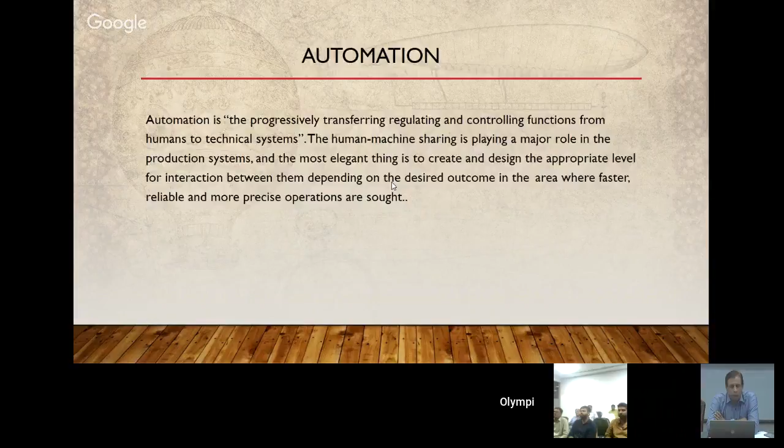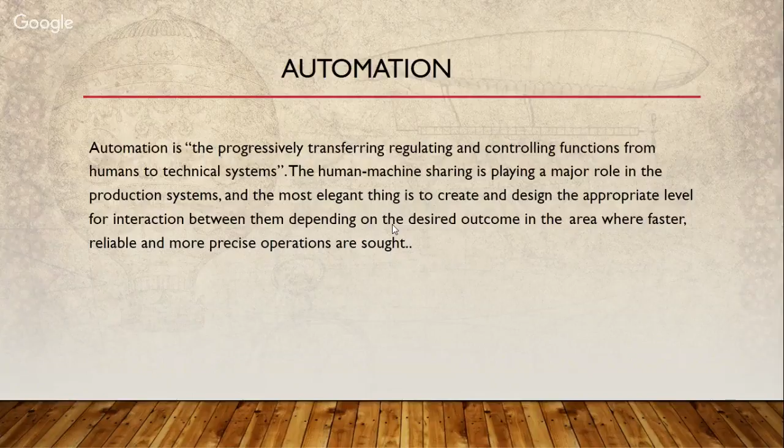Automation is the progressively transferring, regulating, and controlling function from humans to a technical system. This results in higher efficiencies, safer methods, and a faster way of working. There are some debatable questions on this. Some of you might question, how is it safer? If an automated system develops a fault, there is no other angle to correct it. Definitely. So we'll touch upon all this while we talk about automation and human aspect further.

One of the prime examples of automation is in the industry. Industry is the prime mover of everything which moves and develops in the world. The automatic control of the manufacture of a product through a number of successive stages is automation. The application of this automatic control to any branch of industry or science also is automation.

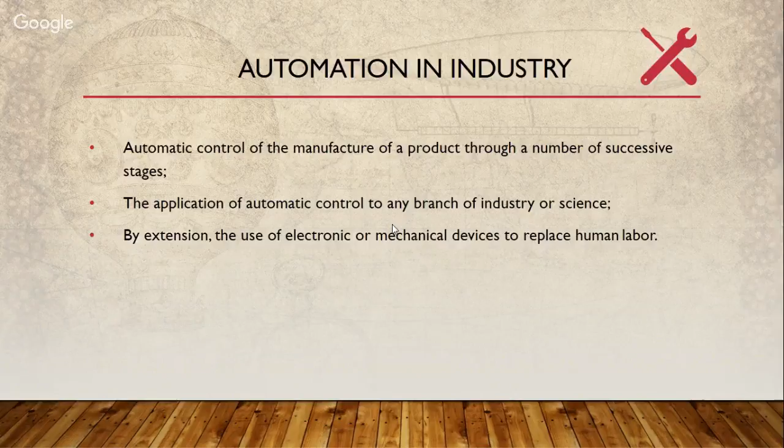So we'll first go into a brief history of robotics, of automation, which you will see on the slide, and you will refer to it, that it started in a period as ancient as Greece and Egypt. This was by way of water, which was powered for ceremonies, in the sense that there were certain ancient ceremonies in which water was used as a power source, and this was the first basic concept of automation in human life.

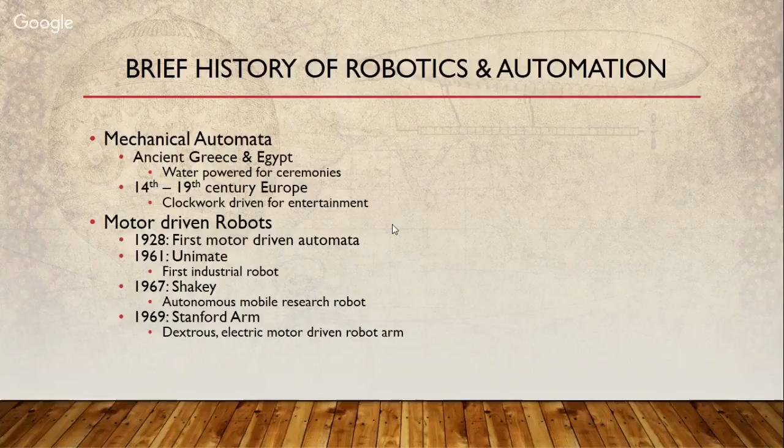In the 14th to 19th century, clockworks and other things driven for entertainment were a part of robotics and automation, or you can say the precursor. Motor-driven robots were first brought into operation in 1928. The first industrial robot came in 1961. The electric-driven motor arm came in 1969.

Now, automation has moved at a much faster pace in the 21st century. We have used automation mainly to overcome human capacity problems, automation of physical tasks like loading, unloading, packing, routine tasks like production increase, welding, nailing, riveting, even segregation. So we are moving at a fast pace in mechanization in the industrial sector in the 21st century.

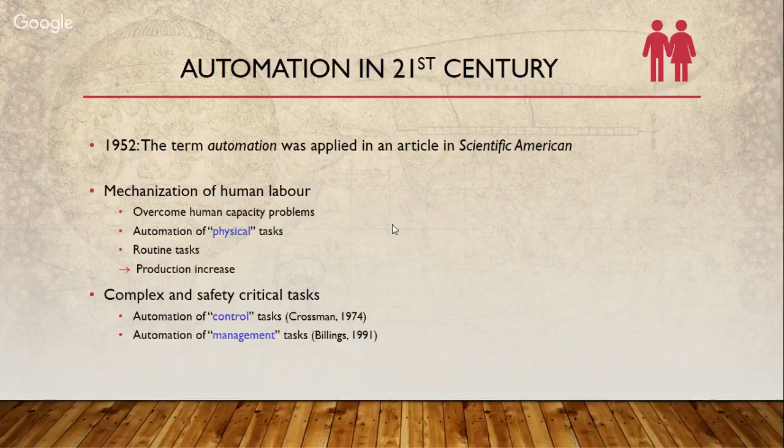Complex and safety critical tasks, control tasks, management tasks are also now moving towards automation. The prime example of automation in our lives is also your cell phone. There are so many things automated through your cell phone, which today are a part of our lives. Knowingly and unknowingly, we are using automation, even to the extent of school children using the technology for their benefit.

In our lives today, automation is used for optimizing logistics, detecting fraud, that's in the financial sector, composing art, we have digital art, conducting research. A lot of research and testing methods are now automated. The data analysis is much faster through automation. Translations, intelligent machine systems like robots, and they are transforming our lives for the better.

You will be surprised, and maybe some of you might not be surprised, but everything that Amazon, Facebook, IBM, and Microsoft is using is a part of automation and intelligence, automated intelligence in our daily lives. Tesla is one of the prime movers in self-driven cars, and that is what they're using for automated controls of automobiles.

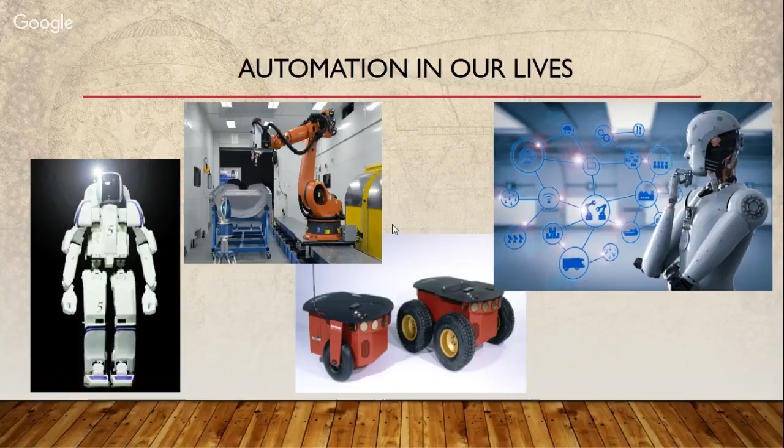The slide shows automation in our lives. You will be very, very aware of all this which is being used today in our lives. Robots, medical sciences robots, automobile industry, in the normal industry, even mobiles. The industrial robots sector is one of the most actively used and efficiently used automation systems in the world. Most of the automobile companies and automobile factories are right now automated to 90% of the extent.

Only certain tasks which are left to manual labor are being done by manual labor. Otherwise, automated robots and automated lines are a part of our lives today. The automobiles are being made more efficiently, faster, and much more effectively. The welding which takes place in an automobile is much safer, much more uniform, and the quality is of exceptional standards, which a human being can never give.

You'll be surprised to know that the rate of production of a car in Maruti today is 1.1 minute for one car. That is the time frame in which a car is being produced in Suzuki. In the Italian automobile manufacturer Fiat, the production rate is 55 seconds.

Okay, sometimes the capacity required at the rate which marketing is able to sell the product also hampers the effectiveness and the speed of the automation. But the capability of the system is such that the factories in Germany and in Italy are and will be able to produce one car every 35 seconds if allowed to, and if the market demands. That is the rate at which we are talking of automation working in the industrial sector.

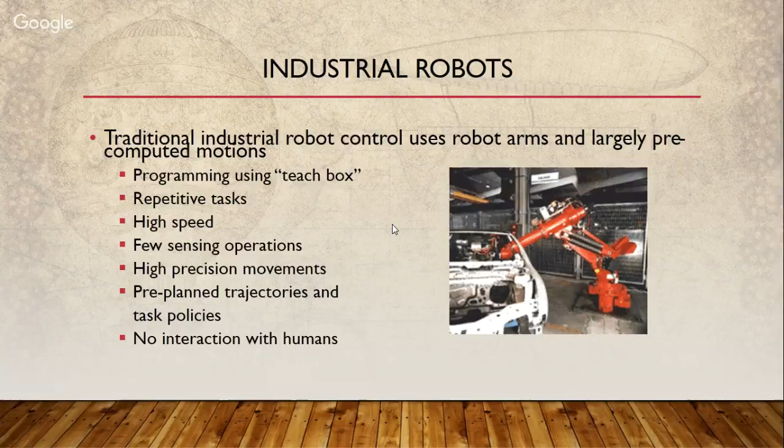If you are able to look on YouTube at a video showing the manufacturing of the Mercedes C-Class car, or even the Volvo, you'll be able to see the extent of automation of these industrial robots which has taken place in the industrial sector, especially in automobiles. The slide also shows you where automation supports us in our daily lives, or in which sectors.

Automation in homes is a part of our lives now. You can control lighting, you can control blinds, curtains, air conditioning, heating, even to the extent of whether the door has to be locked or unlocked is through automation.

Automation has come to stay in our daily lives, and a normal family and a housewife is also using automation to that extent. The human aspect, the role that it plays, we'll discuss about it later. But let's start first viewing what all we can do.

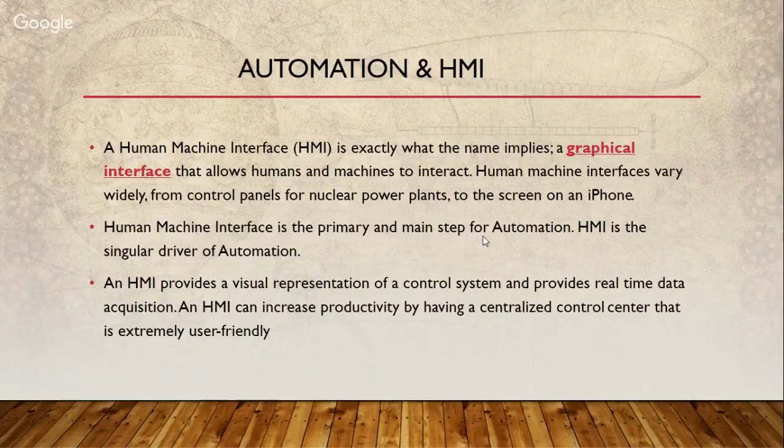This can be in various forms, in verbal, audible alarms, in graphic interfaces, in showing you how actually the product is behaving, how the machine is behaving, and also what corrective action is being forwarded by the machine, that also is displayed to the human operator or the controller of the machine. So the human machine interface is a very, very critical part of the whole system of automation.

Now, before we go into details of automation, we also need to look into that there are certain risks connected to automation. Not all automations are fail-proof or safe. However, the world is moving very fast into correcting these systems and taking care of these anomalies so that the automation that we work with is safer and better.

So some of the risks that we want to talk about is sometimes in the degree of proceduralization. So the automation system becomes too extensively overloaded to work on its own. Automation might fail due to various reasons. The technology is so complex or so low that the automation might not be possible in that.

Cost effectiveness. Sometimes manual labor, like in the third world developing countries, labor is much cheaper than automation. You might not want to automate the line to that extent because spending money on robots, or on automation, is much more expensive than actually putting people on the job.

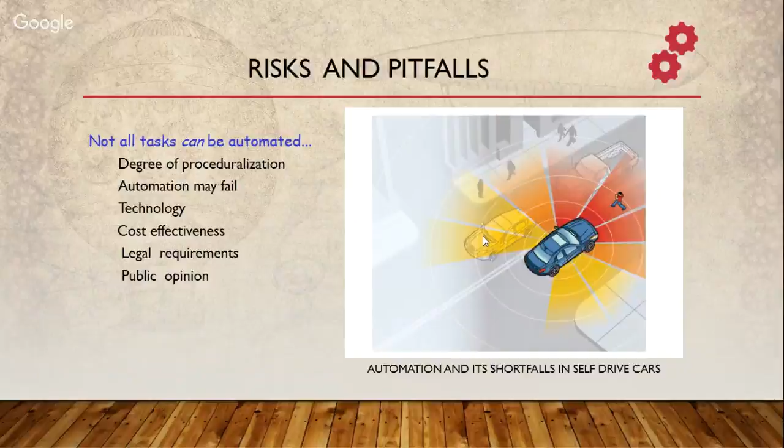You can see an example today in Europe on the tolls. The system is totally automated. Your car has a tag and moves through the lines effortlessly. All cars are equidistant. Sensors are alarming, and everything goes on like clockwork.

But in India, we do not go for full automation even in such places. Why? Because we have cheap labor. On every toll, on every channel, you will find 4 people. On the barrier, 2 people, 1 person giving you a slip, collecting the money. And we are still working in that system because we find that labor is much cheaper than automating the control.

Now, the next point is legal requirements. Sometimes you cannot have an automated system because of legal requirements. You might have to put everything under CCTV surveillance, but there are areas where due to legal requirements, you are not able to put CCTV cameras. So you cannot have control of visualization. Legal requirements also say that people have to be respected for their rights. So you cannot put automation in places where legal rights, privacy, and other things of people are violated.

Public opinion. Public opinion might be very strong against technology in certain places. They will resist technology to be put. And in certain cases, especially like India and the developing countries again, where vote banks are a huge issue, we are not able to put automated technology because getting the votes of the people is more important than making lives better and faster. So that's another thing.

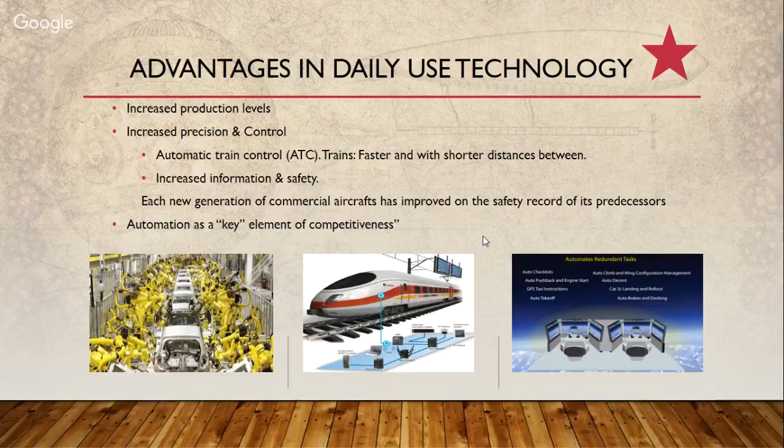We do have accidents in aircraft. The black box gives us information, but it is also a proven fact that overall safety and precision have gone up and the losses have gone down immensely, thereby saving human lives, making air travel much safer, and getting people faster from one end to the other.

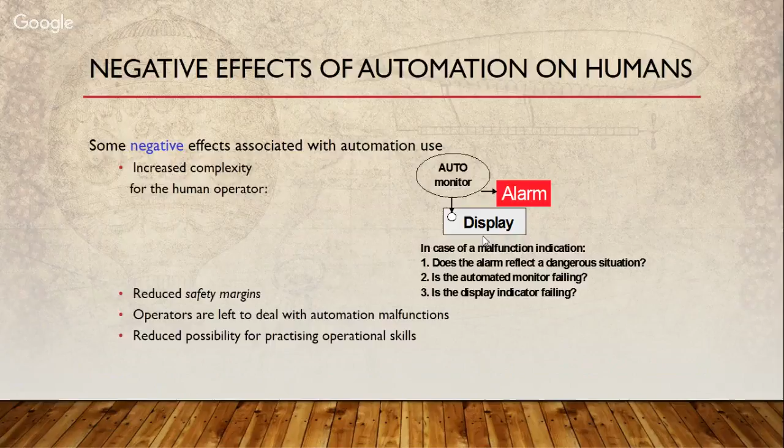If the automation fails, then the results are catastrophic. And that is where we need to keep alert, really monitor the system and take corrective action. The operators are left to deal with automation malfunctions. Earlier the operator had to just deal with his own malfunction, and he had to only deal with how he was performing.

He could recorrect himself if he found that he had moved the tool a little faster. Now the operator has to move at the speed of the machine. A machine is moving at an extremely high rate with the automated system, and the malfunction, if it takes place and the operator is not able to take corrective action, will have serious repercussions.

One of the examples that I would like to share here with you is in one of the organizations where I worked, and we had an automated packing line for confectionery, bubble gums to be exact. Now, the rate of packing of the machine was something to the extent of 2,000 pieces per minute. So you can really experience, if you visualize, the speed at which the machine was moving for giving 2,000 pieces per minute. And there were 20 machines of this capacity working together on the line.

Now, the automated line had to fill jars automatically, where the jar sensing automation system had to cut off the supply of bubble gums into that jar once the 150 mark was reached. You can imagine if one machine was producing 2,000 pieces per minute, 150 pieces in a jar would just take 6 or 7 seconds.

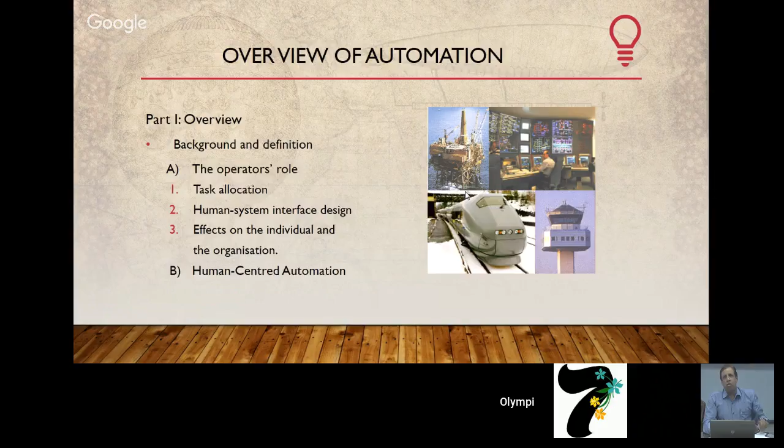The effects on the individual and the organization. As we briefly touched on earlier, the effect of automation on the individual and the organization. If the individuals are not a part of the design system and of the automation system, they will feel alienated, they will not become a part of the change, not be able to embrace technology to the extent where the organization benefits, and shop floor problems will escalate. Human-centered automation is another one, which is a part of the design of the automation system which we have to see.

The key issues of automation: the most important issue is the human. And the human being remains the most flexible and powerful weapon, in the sense that we are able to justify, we are able to reason, we have the cognitive ability to think about a situation, which a machine does not have. In spite of whatever programming you might have in a machine, the human mind is still more powerful than that. Artificial intelligence definitely is moving, but we are nowhere near how a human brain can respond to a situation and be more logical than a machine.

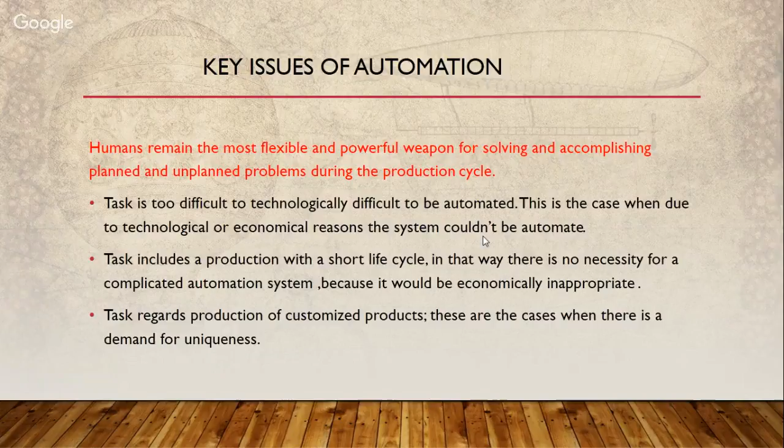The automation system can definitely make it, but again, it becomes unviable. It doesn't fit into our commercial requirement, and we will have to look at an alternative where 10 people can work much more effectively and commercially viably than an automation system. So in these key automation systems, human interference, human logic and human interfacing to take the necessary decision is an important part in deciding automation.

I will now show you two videos of a real-life true incident where flight 1549 crashed near New York into the river. These are a case study of how automation and human beings' logic, thinking and reasoning differ. Just have a look at these videos one by one.

No, it's not, no copyright, no nothing. Don't worry. That's perfectly well. I'll check them, all the videos.

So just have a look at that, and then we can draw our inferences and talk about this. The first video will show you how the investigation took place, and the two pilots who are shown in this. This is a true incident in the history of civil aviation, where Captain Sullenberger, who was the commander, took a decision to land the plane in the river, whereas the automated system was telling that he can land on the airfield. And that is what the inquiry was about. The second video will explain how human logic and human reasoning were much better than the automation system. So just have a look.

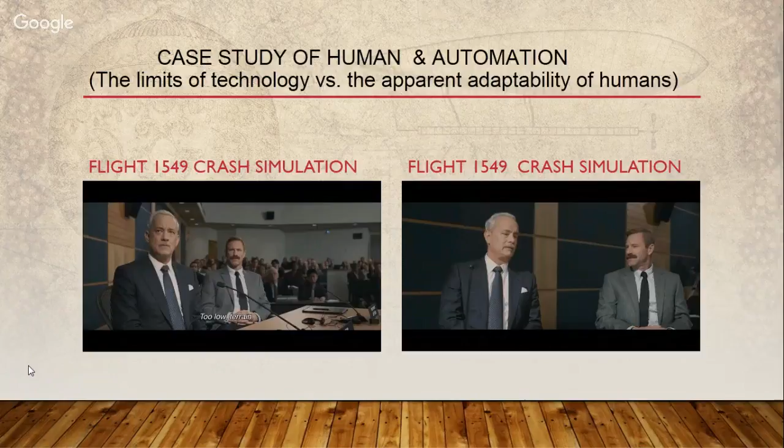Too low terrain. 50, 40, 30, 20. Huh? Successful landing at Teterboro, runway 19. They can have one more. Multiple airports, runways, 2 successful landings. We are simply mimicking what the computer already told us. You know, a lot of toes were stepped on in order to set this up for today. And frankly, I really don't know what you gentlemen plan to gain by it. Can we get serious now?

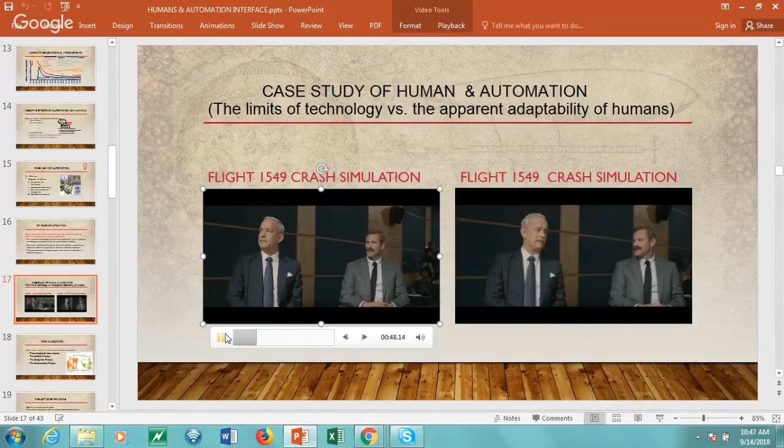Captain? We've all heard about the computer simulations, and now we are watching actual sims, but I can't quite believe you still have not taken into account the human factor. Human piloted simulations show that you could make it back to the airport. No, they don't. These pilots were not behaving like human beings, like people who are experiencing this for the first time. Well, they may not be reacting like you did. Immediately after the bird strike, they are turning back for the airport, just as in the computer sims, correct? That is correct. They obviously knew the turn and exactly what heading to fly. They did not run a check. They did not switch on the APU. They had all the same parameters that you faced.

No one warned us. No one said you were going to lose both engines at a lower altitude than any jet in history. But be cool. Just make a left turn for LaGuardia like you're going back to pick up the milk. This was dual engine loss at 2,800 feet, followed by an immediate water landing with 155 souls on board. No one has ever trained for an incident like that. No one. In the Teterboro landing, with its unrealistic bank angle, we were not the Thunderbirds up there. I'd like to know how many times the pilot practiced that maneuver before he actually pulled it off. I'm not questioning the pilots. They're good pilots. But they've clearly been instructed to head for the airport immediately after the bird strike. You've allowed no time for analysis or decision making. In these simulations, you're taking all of the humanity out of the cockpit.

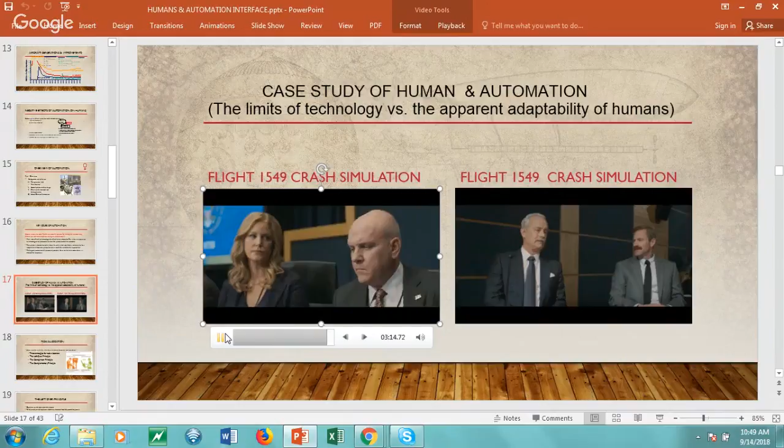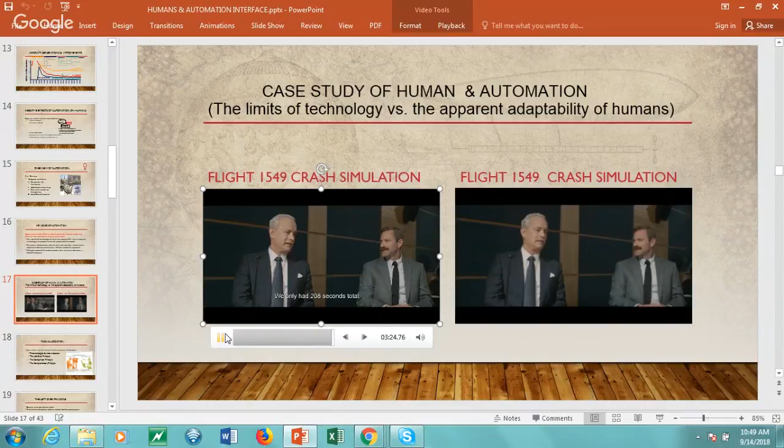How much time did the pilots spend planning for this event, for these simulations? You are looking for human error. Then make it human. This wasn't a video game. It was life and death. Sully's right, that's worth a few seconds. Please ask how many practice runs they had. 17. The pilot who landed at Teterboro had 17 practice attempts before the simulation we just witnessed. The reaction decision time will be set at 35 seconds. 35 seconds, not enough time. We only had 208 seconds total, so I'll take it. Upload the link.

Now let's have a look at the next video, which will show you the simulation that was done and where the pilots were found that they had taken the right decision, because the automated system earlier did not have the same parameters which the pilots had. Just have a look at that.

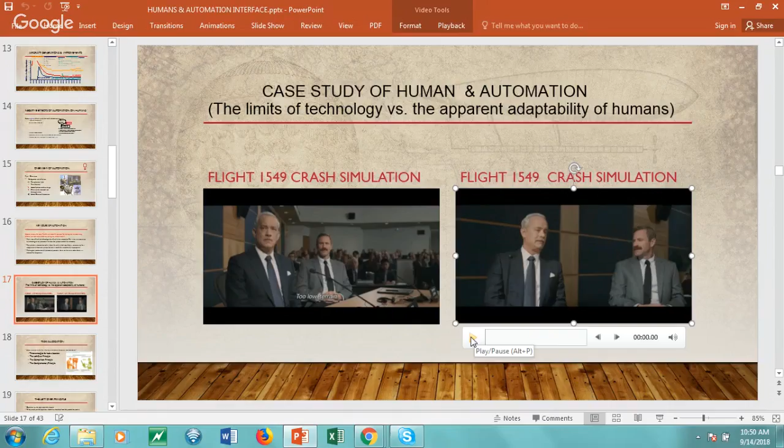Upload the link, return to LaGuardia. Now with an added 35-second delay in response time. Birds. Okay, I saw them. 35 seconds. Time's up. Here we go. Flight path vector. Going for 1-3. Activate confirm. You are confirmed. Okay, ready right for the airport. Obstacle. We're about 7 miles from runway. Caution. Obstacle. Terrain. Pull up. Too low. Terrain. Extra speed. Leave the flaps. Too low. Terrain. 50, 40, 30, 20.

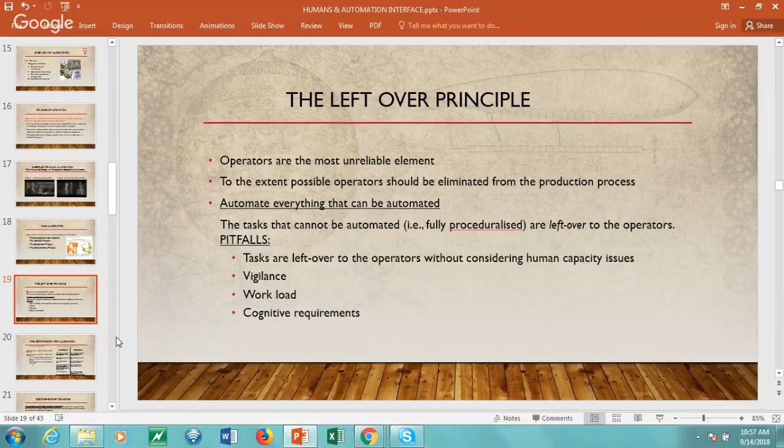The pitfall in this kind of system actually is that the operator needs to be much more vigilant. He is overloaded, and his cognitive requirements are not kept in mind while deciding on these issues. This is where the whole system of task allocation according to the leftover principle fails. So this is not the right system to allocate tasks. You will all agree.

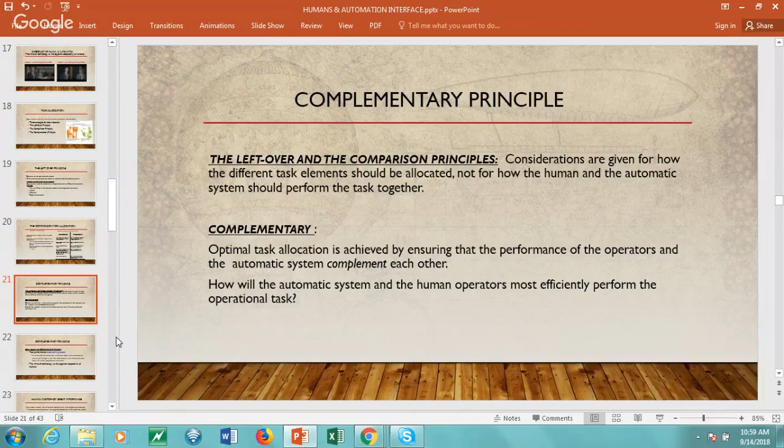They have to work together to perform the task to the best of both of their abilities, rather than just for one. So the complementary principle is the one which is normally decided by the designers who design the perfect system.

The complementary principle also takes into account that performance is a dynamic process. It can be difficult to foresee. So therefore, the system design has to keep in mind, when it is building the complementary process, how machines and human beings have to work together, and the limit of technology.

Sometimes the complementary principle is not able to really give the final product because there is a limit of technology versus adaptability of humans. So there is a limitation on both the systems. So the automation system is not able to perform.

Now, repeatedly, we have seen that the human factor is of great importance in the production system for flexibility, innovation, quickness, and imagination. The human part in the production system is still considered to be incomplete in a full automation system because it lowers the level of automation. Therefore, automation comes into play where the speed and the accuracy will be complemented by the flexibility, innovation, and imaginative process of a human mind.

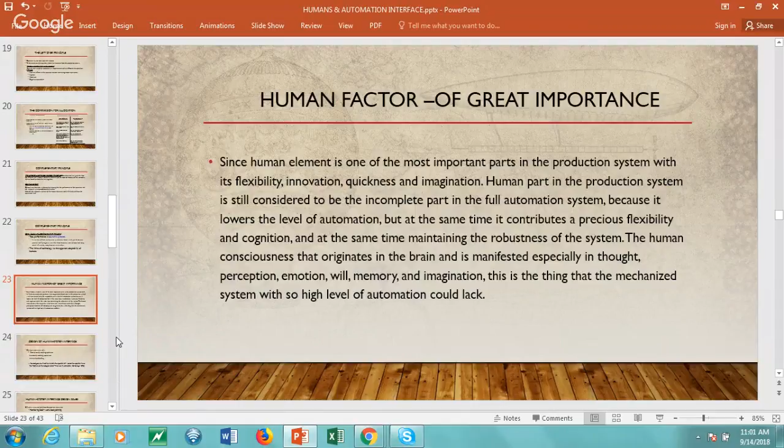On the part of how the tasks will have to be allocated and how the system will have to be designed, we will come after a little break and then talk about human interface designs, how the human system has to be allocated these tasks and how it is able to perform, how effectively we can deal with it, what are the issues that the human aspect also have to be kept in mind while designing an automation system, and what the future holds for us.

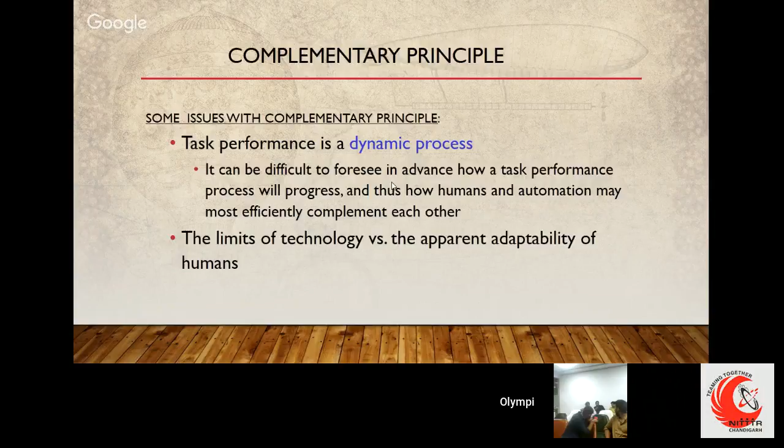You can start. One second. Okay, let's start. Yes, sir. Okay, welcome back, everyone.

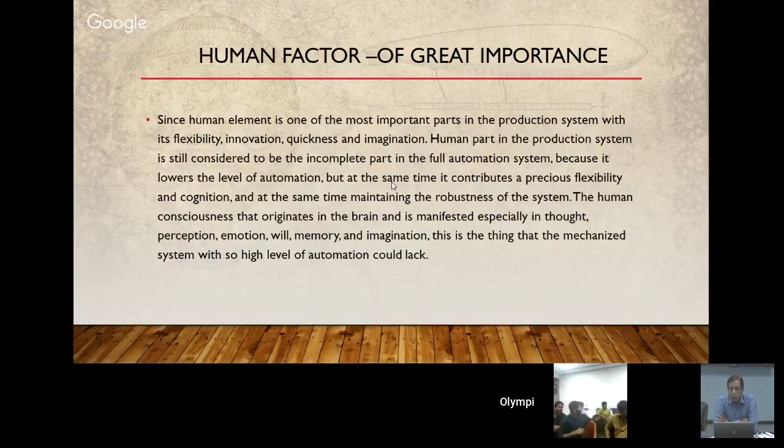So we left our lecture on the human factor in automation; now we'll carry on from that same place. I'll just go through again from the aspect of the human factor in automation. The human element, to repeat again, is of foremost importance because of its cognitive abilities, because of its reasoning, logic, and emotional acceptance, as well as reasoning ability. In the production system, the human factor plays a very, very important part. We have seen that in the video, again to repeat.

Because the human consciousness originates in the brain and manifests in the thought, the human mind still is one of the most powerful systems in the world. Whatever advancements we might have made in automation, the automation system still depends upon the inputs from the human operator. As in every automated system, we say what goes in comes out. Even if the laptop has all the software installed in it, the data which will come out will depend upon the inputs which the human operator is giving into the system.

The next step, I agree, is artificial intelligence. The ability of the automated system to sense by itself, as well as collect data by itself, collect feedback by itself, and then take action. But still, it cannot match the human brain in terms of the inputs and the logic that it can generate.

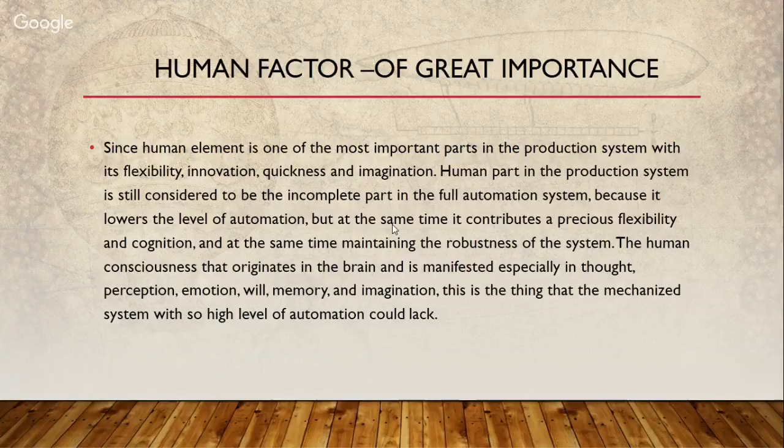An automated system, like an in-flight system of a plane or of a self-driven car, or even the sensors in your normal car, called proximity sensors, which tell you that your car is near to another car or another object, still depends upon the corrective action that the operator will take. So the supervision needs to be constant. The alarm can come, but if it is not supervised, it can still result in an error or an accident.

Deviation handling. If the process has got deviations, it is the human operator only who can handle deviations. The automated system or the interface does not possess the 100% capability of handling deviations. We will have ranges, we will have tolerances in every system. Again, the issue of reasoning and logic comes into play, which the human operator has to handle.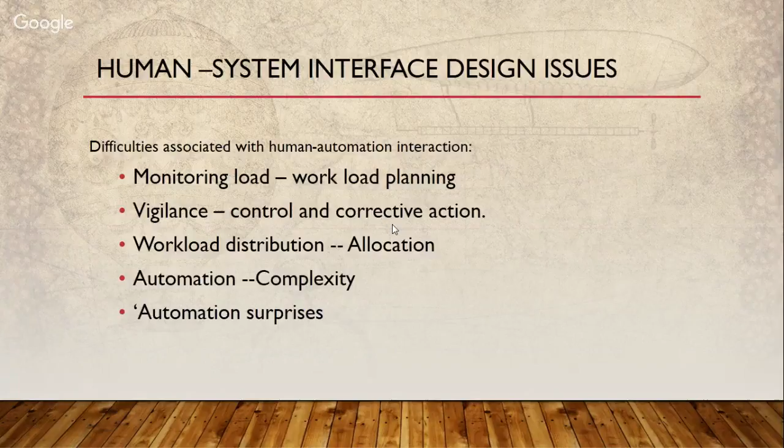Automation surprises. Sometimes we see in operations where the human aspect, because it has not been taken into account while designing the interface, creates surprises where the operator lacks the ability or training to handle automation surprises. The complexity is a part in this surprise.

The automobile companies have started building in alarm systems which, if they sense a monotony in the driver operation, if they see that the car has been going for a very long time in a particular direction but is now veering off course, give a software indication that the driver has gone off to sleep. So they're trying to build that in, and it gives an alarm.

However, taking everything like this into context, we still have physical and mental isolation of the human being while designing an automation system. An automation system which is doing repetitive tasks, where the operator just has to load the piece on a machine, results in a mental and physical isolation of the human being. This results in a lot of other issues which we will discuss later.

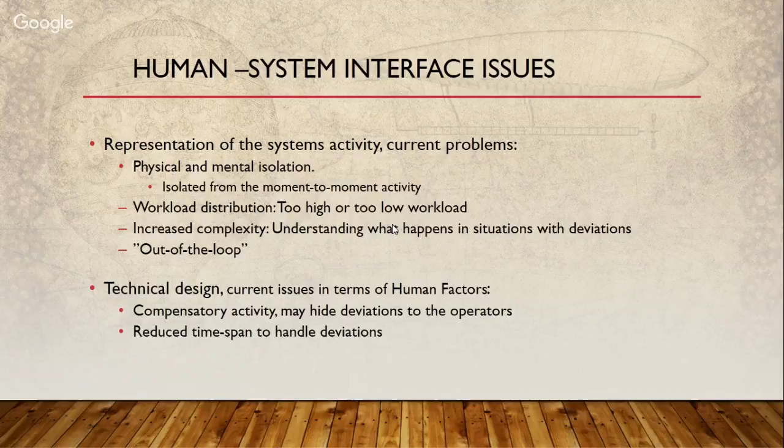In the design of human and system interface, the degree of automated system should be done in a way that is transparent for the operator. So one of the most important factors that comes into play is that the human operator or the human being who's associated with the automated system needs to be aware step by step of what the system is doing, the ability of how the system is performing.

The operator or the human being cannot be blind, or he cannot be cut off from how the system is performing. Now, these problems can be handled by way of feedback from the system in various ways. The system itself keeps the operator or the human element updated on various changes, progress, and work as it is carrying out.

These representations or the kind of feedback that the human operator gets can be in form of text, it can be in form of graphics, it can be in form of sound. So there are alarms which will tell you if there is a deviation or there is a movement which is contrary to the program. There is a graphic which tells you whether the activity is being done according to the way the system has been programmed or the way the system is to run.

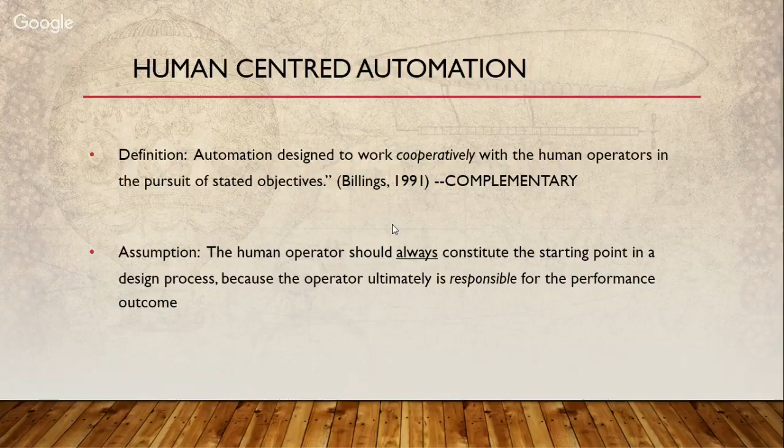HCA, to take it further, the human-centered automation design system, has to first keep the basic premise in mind. That is that the human operator must be in command. We cannot take away the command from the human operator, because that again puts at risk a lot of issues which we have discussed earlier: taking corrective action, not getting the hang of the complexity of the system, not being able to respond faster to errors. All this comes into play.

So once we have taken that the human operator is to be at the center of this command, why is it to be done? One, so that he's able to command effectively. The human operator must be involved, then only he'll be able to command effectively. To command effectively and to be involved, the human operator must be informed. So he has to be a part of the feedback system. Immediate feedback or immediate response has to come to the operator to feel involved and to command the operation.

The human operator must be able to monitor the automated systems. Being informed is a part of monitoring. So if there is regular information, he will be able to monitor the system much more effectively. The automated system needs to be predictable. Unpredictable systems will result in accidents and errors, which the human operator will never be able to handle. It has to be a predictable system.

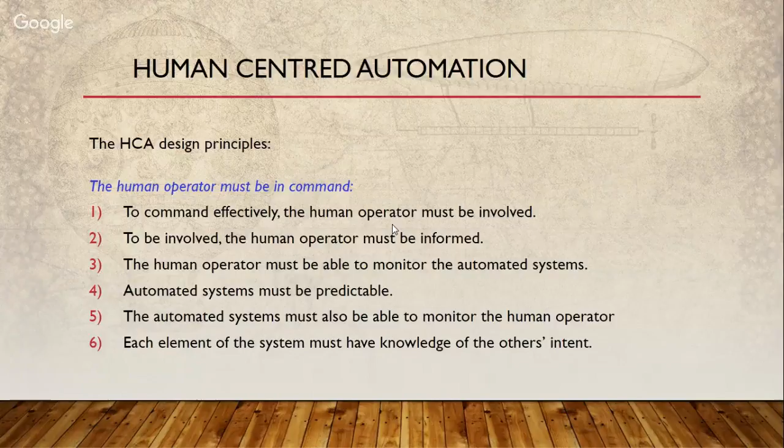Each element of the system must have knowledge of the other's intent. That means the operator should know what is the intent of the machine, and the machine should know what is the intent of the operator. If this is very, very clear between the two, then the automation system works effectively and in optimum capacity.

If the pilot is involved, the automation system can assist by providing better and more timely information. So it aids judgment, whether he can turn, whether he can land in these circumstances, what is the wind velocity, what is the temperature, what exactly are the air pockets. So all this can assist in timely information, can help in taking a better judgment.

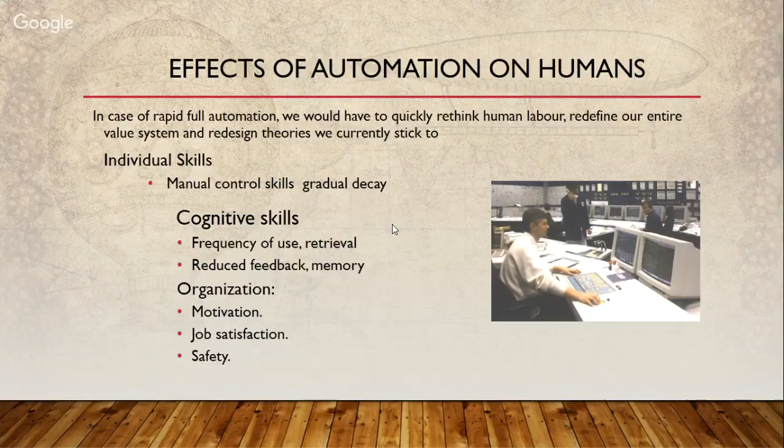In the organization, the effect automation has is on motivation. If human-centered automation design is not taken into account, motivation is a very big factor which comes into play and affects the morale of the worker. The worker might have worked for a bonus, an incentive or satisfaction, where the number of pieces he produced was part of what he was earning, also to show his skills, his effectiveness, his capabilities. There was a number with which he could be associated, that this worker has won a prize because he could produce X number of pieces in his shift.

If the automation system is designed without him, the effect it has on his morale, with people saying, oh, it's the automation system producing, it is not you: his capabilities are undermined and his motivation level goes down. The other aspect is he will always feel threatened that his incentive is going down because he is no longer associated with productivity. Job satisfaction results in the same thing. When the motivation goes down, the morale goes down, job satisfaction starts going down, and the operator will never perform to his optimum level.

Safety, because the worker will become complacent. He will think that the automated system will take care of itself. He will not be that vigilant. Again, we come back to reduced feedback, reduced memory, which are effects of automation. This also results in complacency. The complacency results in accidents.

You will find that although automation helps in giving alarms, if the operator is not vigilant enough and because of repeated working day in, day out on an automated system, his reflexes go slow, and that results in lack of safety.

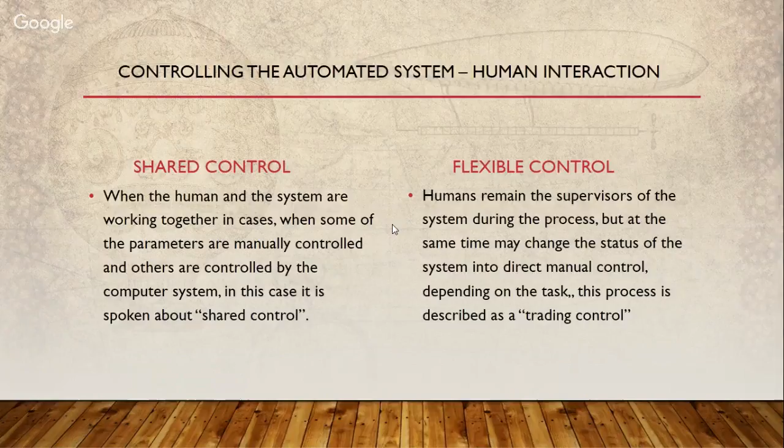The human beings remain the supervisor of the system during the process, but at the same time may change the status of the system into direct manual control. This is very, very relevant in flights, in aeroplanes, where the plane can be on autopilot, but depending upon the situation, the pilot can always take control.

This is also done in flight training aircraft, where the co-pilot has the controls, but at any point of time, the main pilot, if he feels that the trainee pilot is not behaving according to the requirements or has the system out of control, can immediately take control of the system. It is a very good example of what can be done with human beings and with automation systems to have a shared control. So the need of the hour is to have flexibility in the system.

The system has to be robust, but yet flexible to adjust to the needs. And this can only be done when the human angle and the automation angle work together to create a flexible system, where the automation system is driving it for speed and accuracy. However, the human intervention is always there depending upon the feedback and continuous transparent information which is relayed back to him to take control and to get the best output from the machine.

If you'll have a look at this slide of flexibility, it definitely says that flexibility is of great concern. We know that because this flexibility does not exist in automation systems to that extent which we want. Flexibility is a multi-dimensional concept that couldn't be measured and clearly defined. However, from a technological point of view, flexibility characterizes process as easier, faster, with the capability of changing the level of performance.

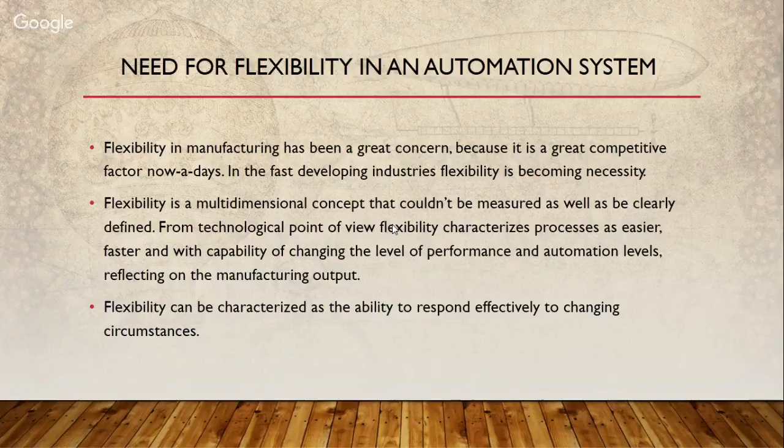That's exactly what I was saying, that the system, although being fast, error-free, and working according to a set program, still retains the flexibility with the human intervention of making a decision, taking a logic into account, and taking corrective action when desired. So flexibility can be defined as the ability to respond effectively to changing circumstances. So this is where it comes, and this is where the collaboration has to happen between humans and automation.

We will just show you two videos here again, which give you the present use of how automation and the human angle have come into allocation of tasks, where we are using automation, where actually if only human labor was used, it would have resulted in much lesser productivity and a less efficient process, how automation has helped in this, and also take you through how automation is moving ahead for the future to keep in mind these collaborative issues and really take technology to a newer level. So just have a look at these, and then we come back to the slides again.

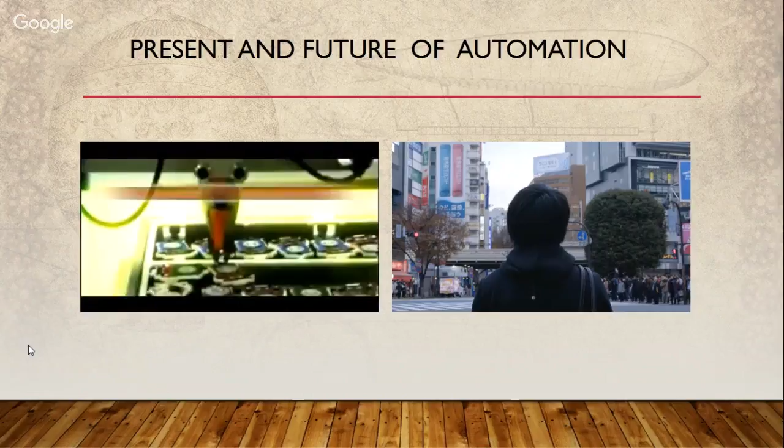So we were able to see some of the jobs which are practically being automated. These, you must have realized, are also activities which are repetitive, intensive, require precision and accuracy, and would be very cumbersome for an operator to repeat time and again. So this increases efficiency and the speeds of production to a huge extent.

We'll now go to what exactly is the future of automation, where we are trying to reach, what we are trying to do, just to give you an idea. This is also from YouTube. So let's take it there.

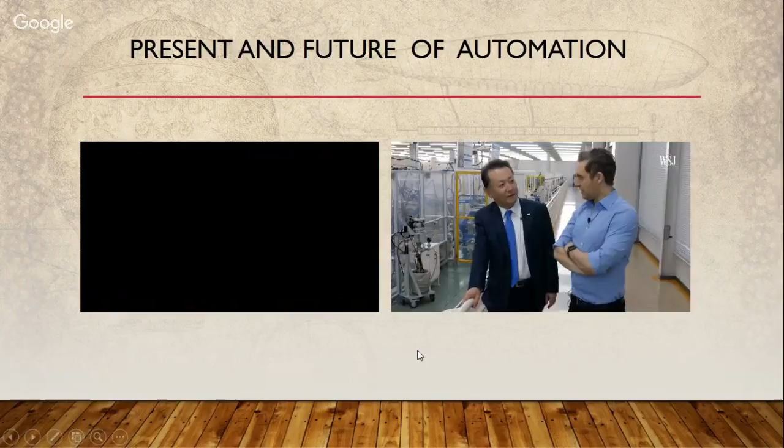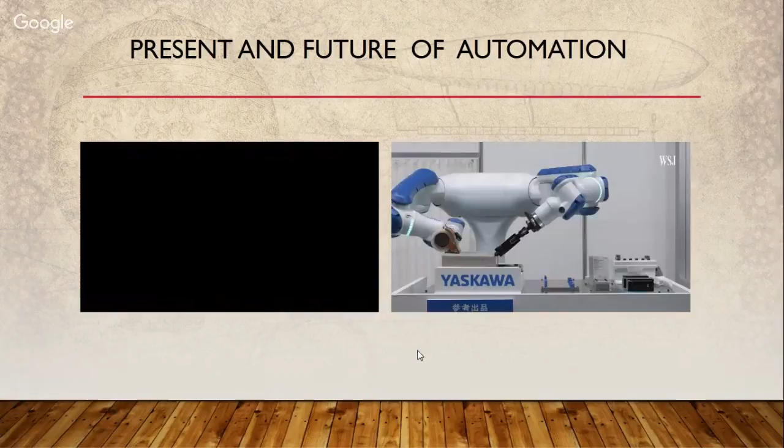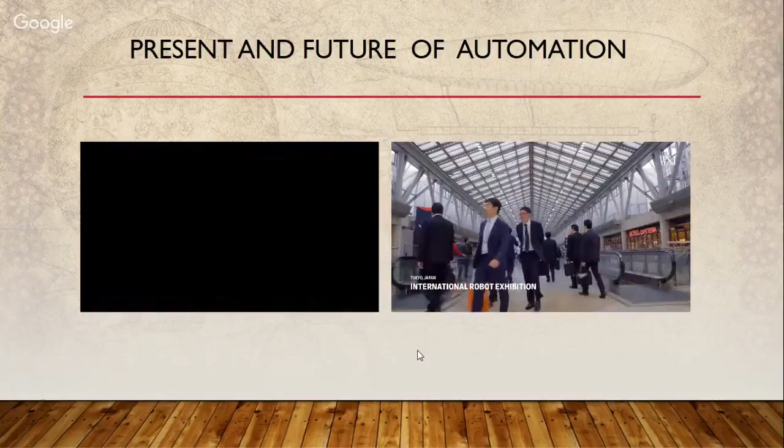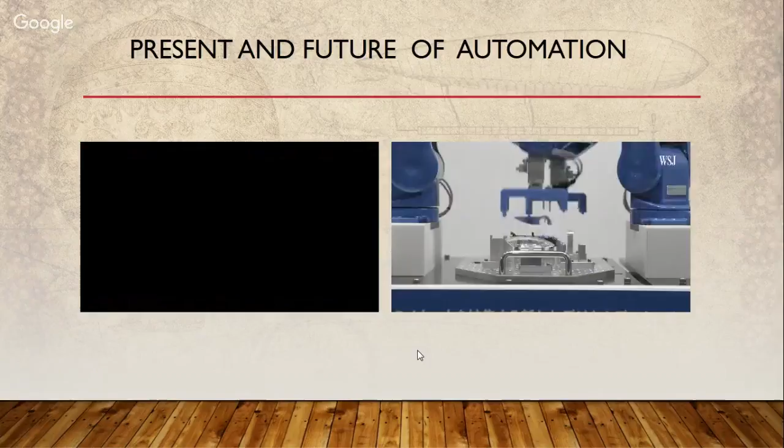These are the types of robots Professor Eric Brynjolfsson is keeping an eye on as MIT's chief scholar on the digital economy. We used to have to really painstakingly teach the machines step by step, program them what to do. And now machine learning is enabling the machines to figure out on their own how to solve problems. You put together the algorithms, the data, and the computer chips, and you get sometimes a millionfold improvement in the performance of these systems. A millionfold improvement. Yeah. And what does that allow you to do?

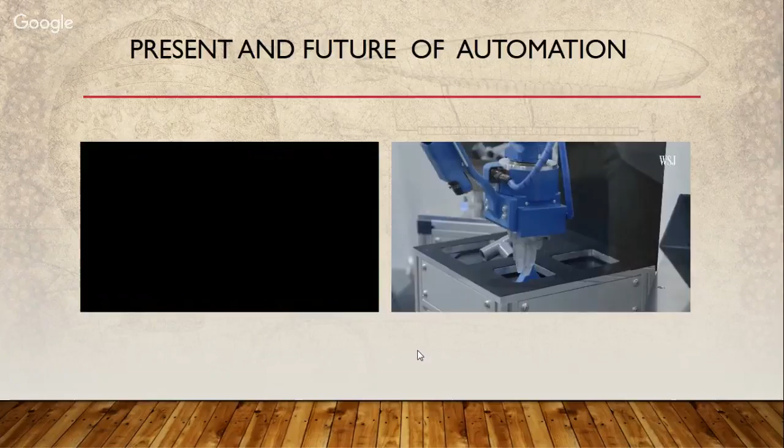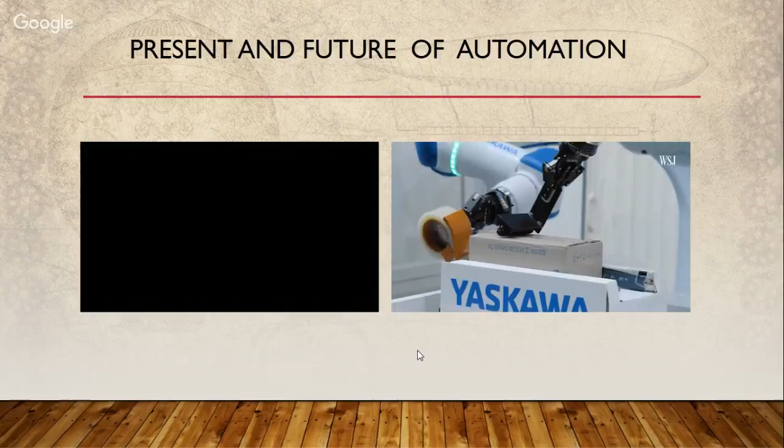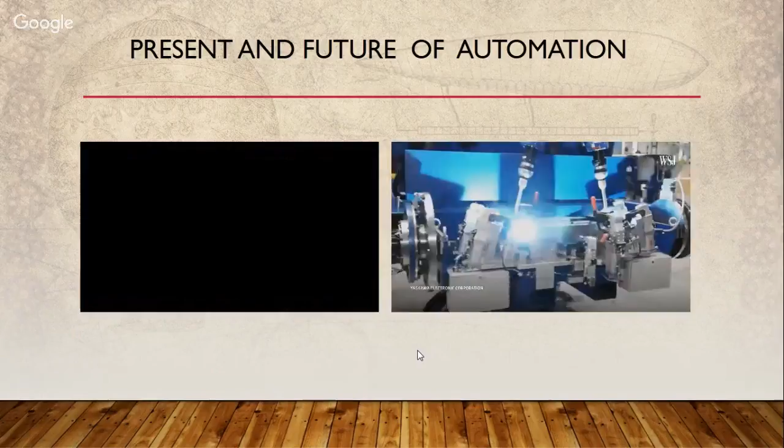So one really important thing to do on the factory floor is just be able to recognize objects. And that's something that only humans could do well until recently. At IREX, we witnessed a robot handling a task that I, as a human, don't do so well. Futzing with one of those pesky tape dispensers. It's among the latest offerings from Yaskawa, one of the world's largest manufacturers of industrial robots. Its main sellers are large industrial robots that do dangerous things like welding car parts. We visit one of Yaskawa's robot manufacturing facilities in the southern port city of Kitakyushu.

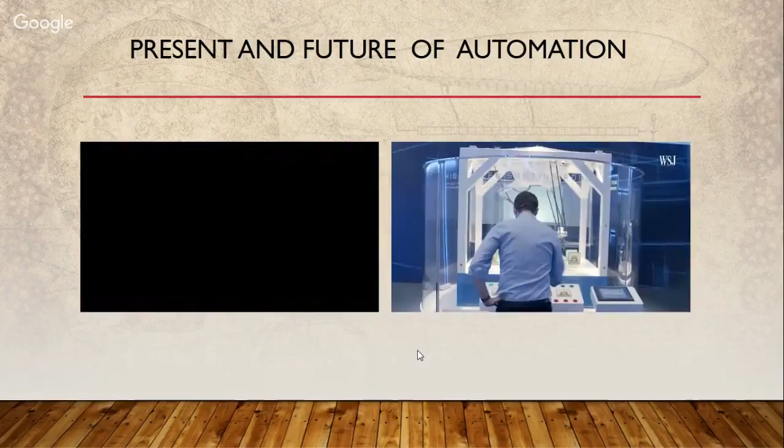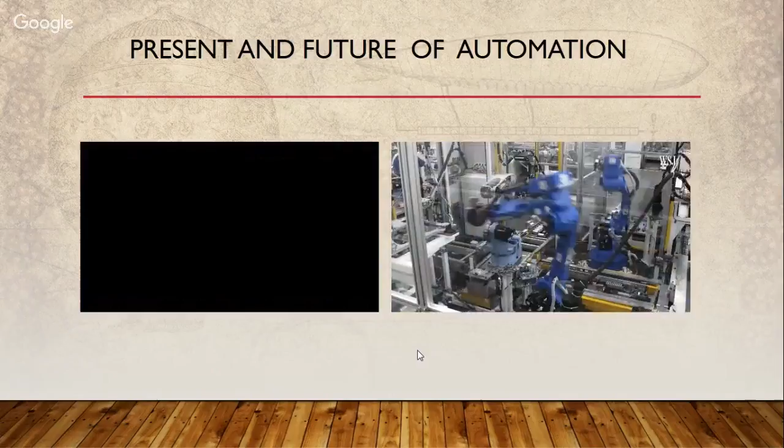Here, the public can try controlling and racing against AI-enhanced robot arms. You're done. We got to see where the robots are made. The robots themselves, they're sealed off by these plastic barriers. The workers aren't allowed to be in there while they're in operation because they're making these very fast movements.

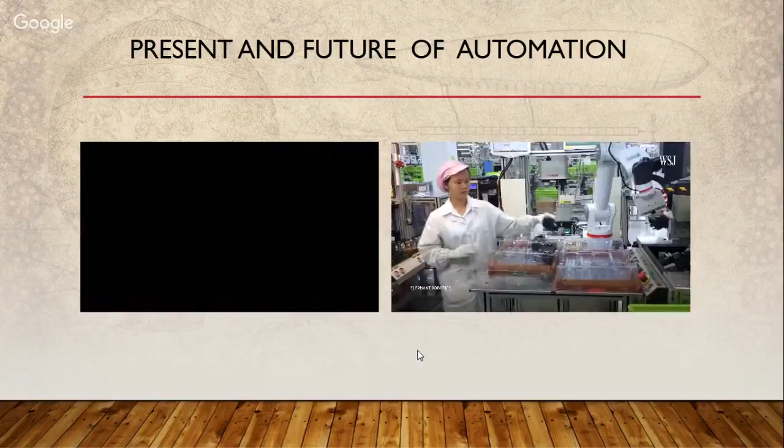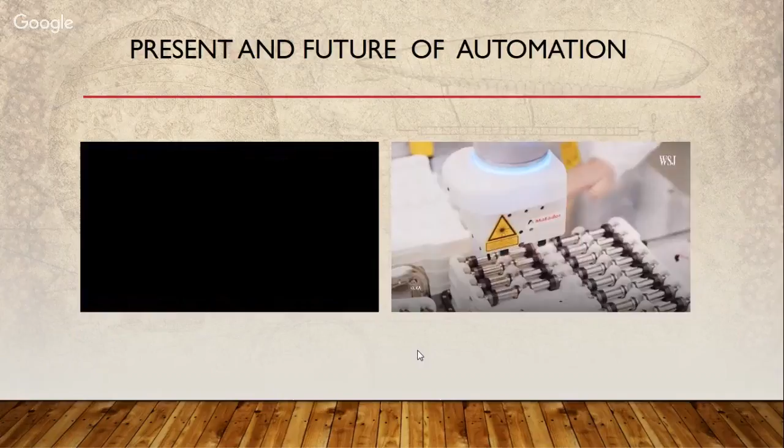The head of the robotics division at Yaskawa, Masahiro Ogawa, seems most excited to talk about robots that don't need to be walled off from humans, that work alongside employees. In the industry, they're called cobots. The International Federation of Robotics predicts in coming years, cobots will lead the robotics industry. That's partially what's driving startups like China-based Elephant Robotics to get in the game.

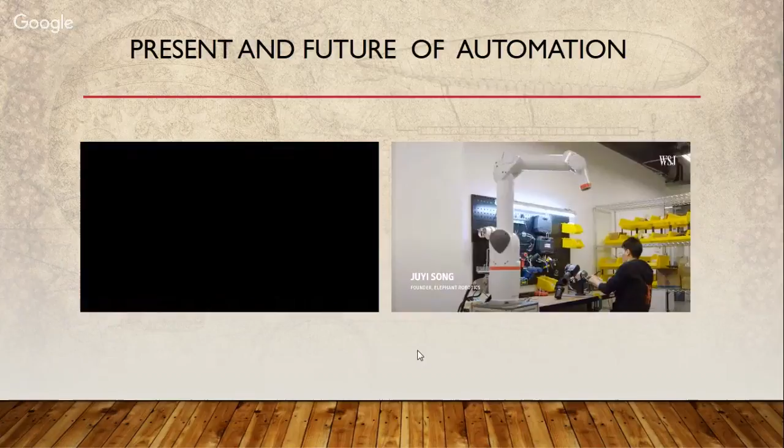Hit people, so you just stop. Yeah. So work with people. Yeah, works with people. We asked their founder, Juyi Song, how his cobot is different from traditional robot arms. It moves not that quick, and it is very, very light. Okay. So it can work with people. So this is the most important thing.

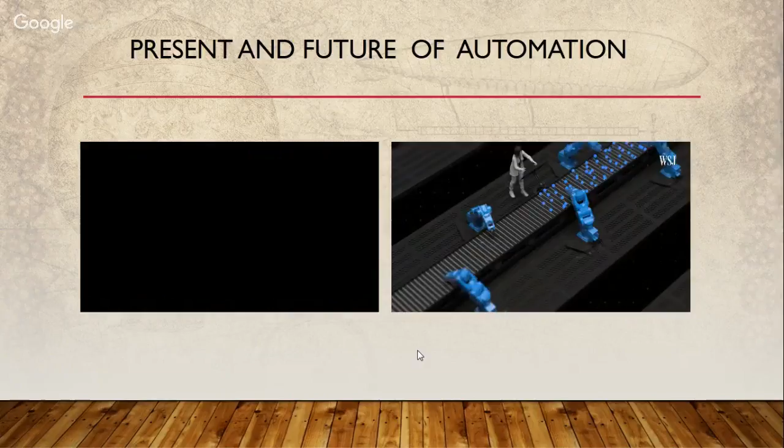In addition to being safer, the collaboration proves to be more productive. A study conducted by MIT researchers found that human-machine groups were more efficient than teams wholly comprised of one or the other. They also reduced human idle time by 85%.

While traveling through Japan, we visited Huis Ten Bosch, a Holland-themed amusement park. There we checked out its latest attraction, a robot restaurant. How many okonomiyaki pancakes can the robot make in an hour?

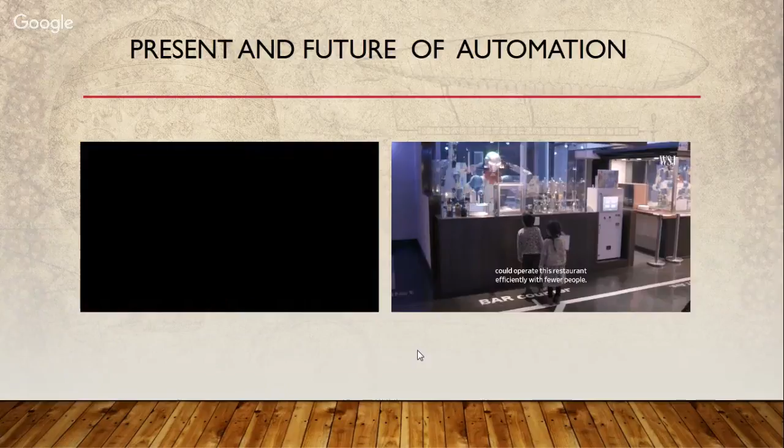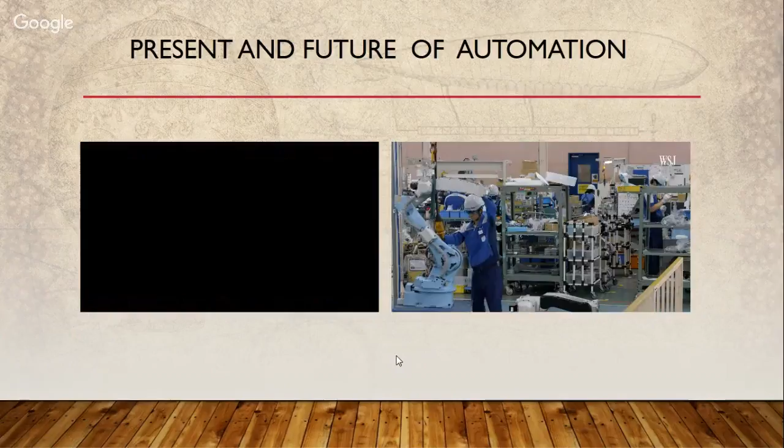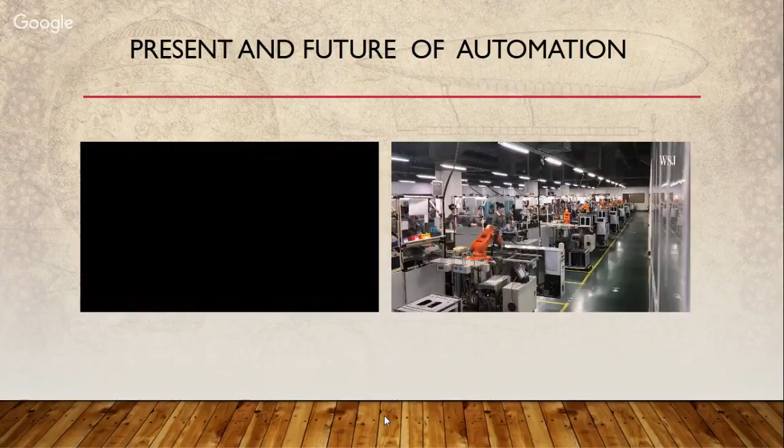Back at Yaskawa, Ogawa tells us most of the customers who come to him looking for new automation solutions come from China. China market huge, and the growth ratio very high. How high? Last year, Chinese demand for robots grew more than 20%. One reason for that is China's working population is aging. By 2060, the average Chinese citizen is projected to be 50 years old.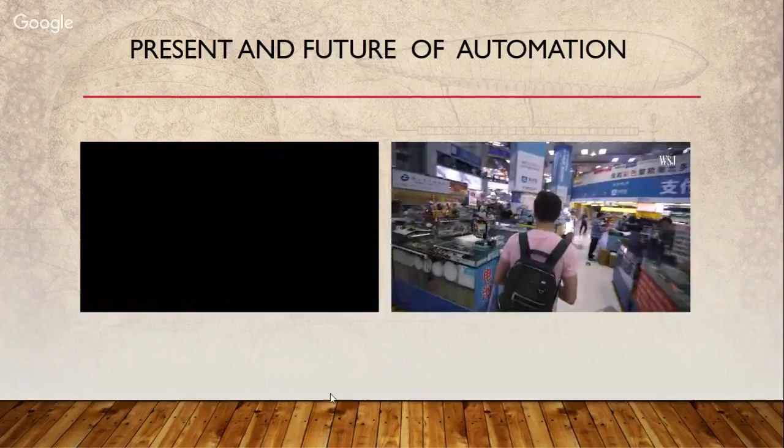To see the impact of industrial robots on manufacturing in China, we traveled to an area that's considered the electronics capital of the world, the Pearl River Delta region.

So just to hold it a little bit here, the idea to show you here was that it gives you a very direct insight into cobots. The idea that we were talking about in human-centered automation design, where we are talking of collaborative and complementary automation. Cobots is the direct descendant of this philosophy. And as you must have seen, the experts in the field also were commenting that the day of robotics is finishing off and the day of cobots is the future.

The idea to show this video was just to take you through what the future holds and what exactly we are moving towards. So this video gives you a direct insight that there has to be a collaborative effort and the robots have to collaborate with humans. That is why they are called collaborative robots or cobots. If the worker and the robot or the automated system are able to work together, that is the best for the industry in terms of error-free and speedy productivity or achievement of targets, whatever we call it.

It can be in any industry. So let's not limit ourselves to the production lines in a manufacturing facility. The collaboration of the automated system and the human being is the most important aspect of any automated system to be implemented in any facility. So let's move to the next, where we see the human automation cooperation in critical fields where it can take place.

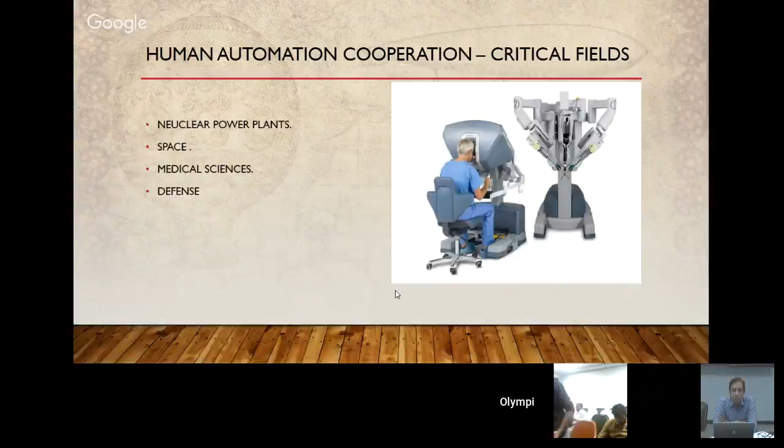The latest field in which this has been inferred, and this is going on at a very fast pace, is medical robotics. Medical operations, surgeries are now being done by robots but controlled by human beings, in the sense that the doctor is able to analyze the whole system. He's able to see the patient. He's able to detect the symptoms, the area of operation, and through the robot and the simulator that he controls, he's able to do a surgery or an operation with very high precision and in an error-free mode.

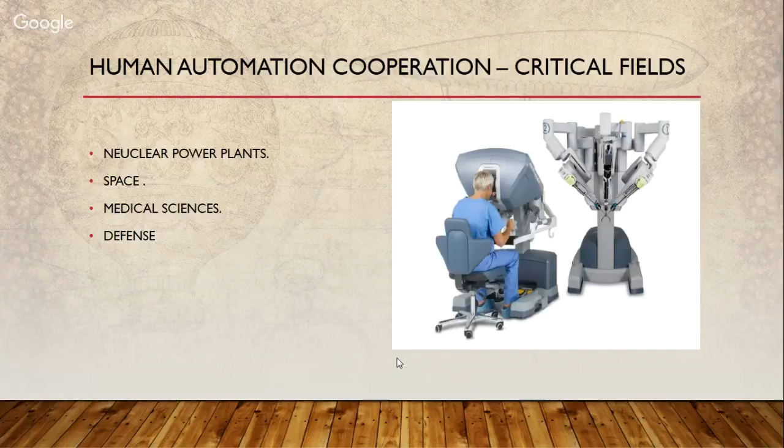Eye surgeries, heart surgeries, brain surgeries are now on a large scale being done through medical robots, but being controlled by a doctor. You cannot expect the doctor to really let the robot work alone. The robot will never be able to work alone because it is the judgment and the logical decision of the doctor, the analysis which the doctor has done of what has to be done where.

Again, these are decisions which work in collaboration the best, and the outcome for a patient to have an error-free, high precision surgery done by a robot being controlled by a doctor is the ultimate that you can think of in human automation collaboration and cooperation.

Space is another field, as we've discussed earlier. The astronauts, their instruments, the equipment are controlled even from the space station down on Earth to help them out in activities which they have to do in space. The data being collected, the analysis of that whole data, giving feedback to the astronauts and to the space station is again done through systems which are hundreds of thousands of miles apart from each other.

Defense is another field where automation and human cooperation is happening at a large pace. Drones used to attack and neutralize terrorists or targets which are supposed to be unsafe for human beings or for human civilization are controlled by human beings at a remote location, and the attacks are carried out.

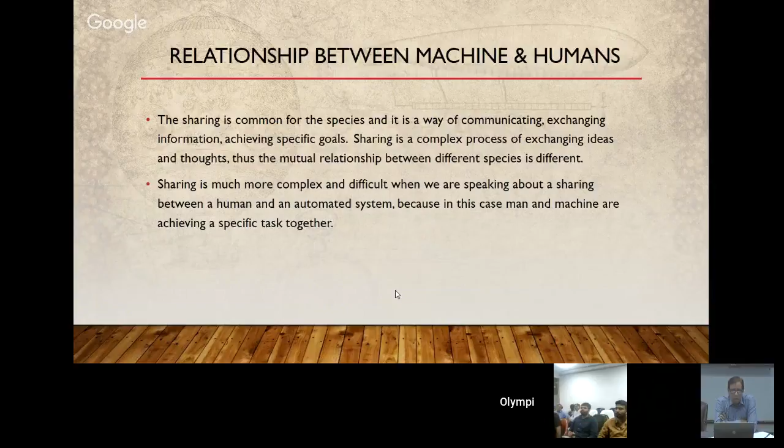Okay, coming to the next slide, we have the relationship between machine and humans. Sharing is common for the species, and it's a way of communicating and exchanging information. As I had given an example in the lecture in the morning, human beings are the only species on Earth which can communicate with logic, with visualization, and exchange information. Now human beings themselves are developing artificial intelligence and automation systems to the extent where this information can be exchanged for the benefit of everybody.

Sharing a complex process and exchanging ideas and thoughts was till now the singular domain of human beings, but now through automation systems it is being done to a large extent over hundreds of miles apart from each other. Because sharing is a complex and difficult phenomenon, we talk about the sharing between a human and an automated system because of the tasks that they can achieve working together. The automation system provides the speed, the human system provides the logic and the cognitive facilities, and together they can achieve much more than each system standing alone.

The conclusion to which we come is that the combination of human and automation control is most desirable. The collaboration and the human aspect, if taken into account while designing a human automation interface, is the one which will take society and technology further. The purpose of the automation system is to perform and evaluate all necessary tasks, but it can do it more effectively, in a much more logical way, if the human angle is taken into account while designing the automation system, and the fine balance in this collaboration is maintained. Thank you.